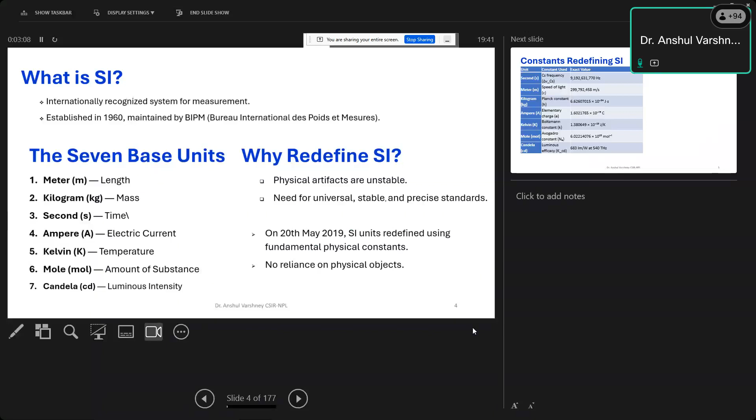The main benefit of moving to physical constants is that there is no reliance on physical objects, so there is no chance of any change in the standard. Based on the 2019 redefinition, the second is now defined with the help of the hyperfine frequency of cesium, that is 9192631770 hertz, and the meter is defined using the speed of light.

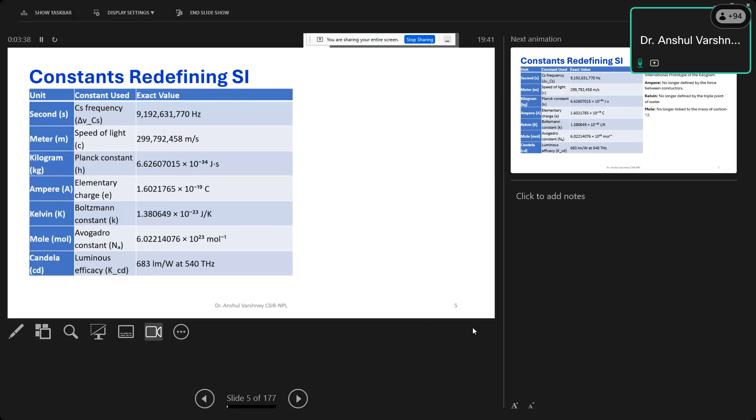Similarly, kilogram has been redefined using Planck's constant, ampere with the help of the elementary charge of the electron, Kelvin with the help of the Boltzmann constant, mole with the help of the Avogadro constant, and candela with luminous efficacy.

So now, major changes: the kilogram is no longer based on the international prototype of the kilogram, which was a physical artifact. Now the kilogram is defined with the help of Planck's constant, which will never change. If environmental conditions change, there will be no effect on Planck's constant.

Similarly, ampere is no longer defined by the force between two conductors; it is now defined with the help of elementary charge. Kelvin no longer has a relation with the triple point of water; it is now defined with the help of the Boltzmann constant. Similarly, mole is no longer linked to the mass of carbon-12; now it is defined with the help of the Avogadro constant.

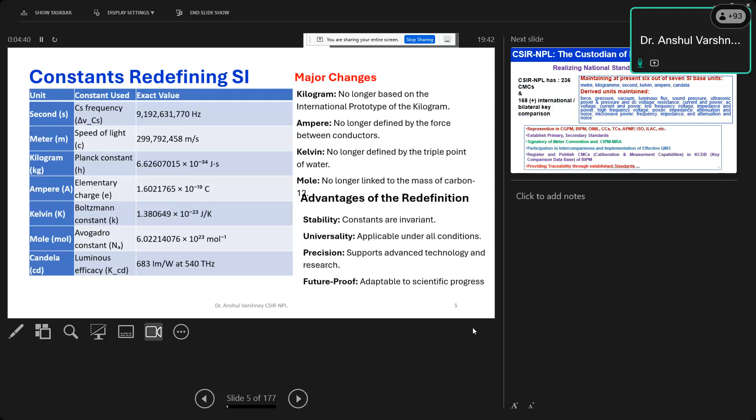So the advantage of this redefinition is that constants are invariant. These are applicable under all environmental conditions, and they provide very precise measurement which supports advanced technology and research, and are adaptable to scientific progress.

So if I talk about NPL, NPL is basically realizing national standards of measurement. NPL right now has 236 CMCs. CMC means calibration and measurement capability. Every country has some CMCs, and that CMC data is maintained in an international database. The ranking of a country is defined with the help of these CMCs. Right now India has 236 CMCs, but in the coming year it is increasing.

By the end of next year, it will cross around 280 CMCs, and we have participated in more than 168 international or bilateral key comparisons. So what is a bilateral or international comparison? In an international comparison, basically we send one artifact to a number of countries. Every country does some measurement, and then the analysis of that measurement is done based on the actual results of those artifacts.

Right now NPL has representation in CGPM, BIPM, OIML, CCs, TCs, APMP, ISO, and ILAC, and it is establishing primary and secondary standards of measurement. NPL is a signatory of the Meter Convention and the CIPM Mutual Recognition Arrangement, and we actively participate in various intercomparisons and the implementation of an effective quality management system.

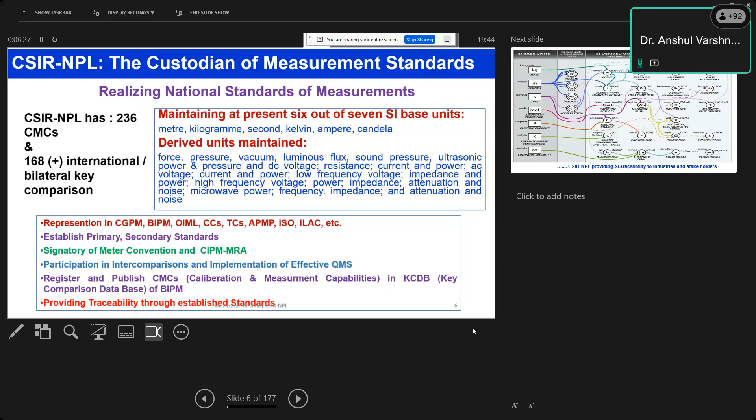Every month we are registering and publishing more and more CMCs in the key comparison database of BIPM, the Bureau of International Weights and Measures, France, providing traceability to the country through our established standards. So basically we are maintaining all the SI units and their derived units. You can see there are... just one second, let me point this out.

These are the SI units and their derived units. So we are maintaining all the SI units and their derived units.

At NPL, we are serving government, semi-government, private industries, even SAARC nations. We are providing support to all PSUs, all defense and strategic sectors, BIS and other calibration bodies also.

So now I have a small video which will show what NPL is doing since 1947. It's not a long video, only about 1 or 2 minutes.

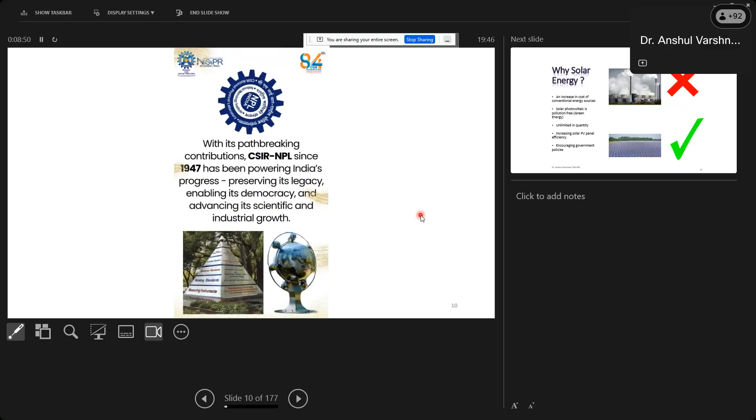So this was about NPL. You have seen in this video that our Prime Minister is viewing the Constitution of India. That is the original handwritten Constitution of India, which is being preserved by NPL.

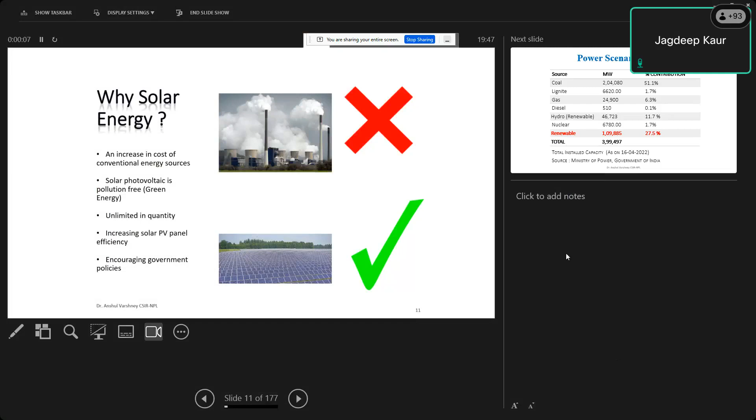Excuse me sir. Yes madam. Sir, I think only your first slide is showing, presented by Dr. Anshul Varshney. Just one second ma'am. No sir, your screen is visible to us. I think the slides are visible ma'am. Some network issues. Slides are changing, sir. Some problem, madam. Okay, okay, so I am continuing.

As you have seen, the original handwritten Constitution of India is preserved by NPL. You have also seen that whenever you cast your vote, that person puts some ink on your finger. That ink was basically developed by NPL, and later that technology was transferred to Mysore Paints.

So now I'm starting my presentation on solar water pumping systems. What is the need of solar energy? Why is solar energy required?

Right now, day by day there is an increase in the cost of conventional energy sources, and they are responsible for increasing pollution also. However, solar photovoltaic is pollution free and known as green energy, available in unlimited quantity. As Dr. Arun already told, NPL is doing great research in solar cells, working to increase the efficiency of solar panels. There are also several encouraging government policies, which Dr. Arun already explained, because of which solar energy has become a prominent source of energy for various applications.

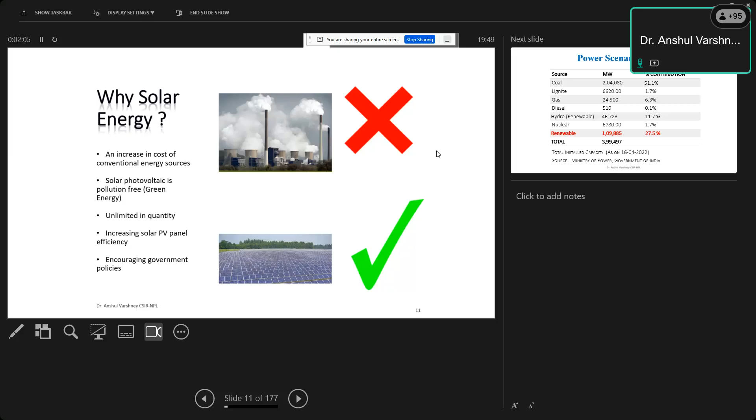This is the power scenario in India as per some old data. Coal contributes 51.1%, lignite 1.7%, gas approximately 6.3%, diesel 0.1%, and hydro 11.7%. Similarly, these are the renewable energy scenarios in India, including hydro also.

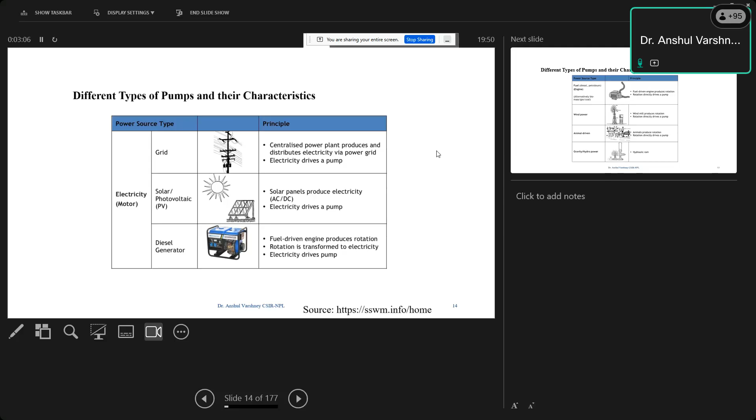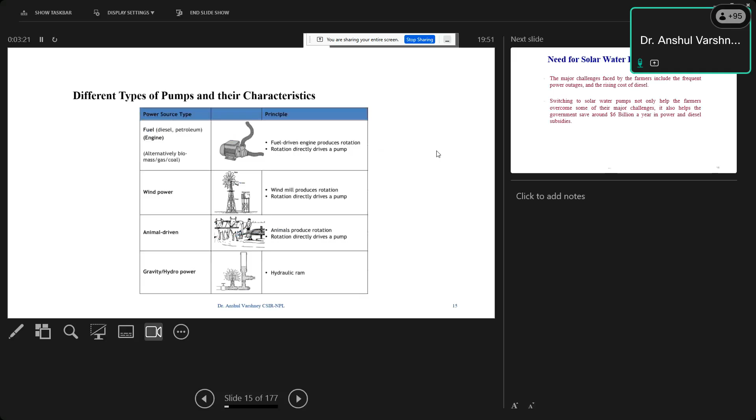Similarly, in fuel based water pumping systems, a fuel driven engine produces rotation that directly drives the pump. There are also wind power based water pumping systems, earlier used animal driven water pumping systems, and hydropower systems. So what is the need for solar water pumping systems?

The major challenge faced by farmers includes frequent power outages and the rising cost of diesel. Switching to solar water pumps not only helps farmers overcome some of their major challenges, but also helps the government save a huge amount of money in power and diesel subsidies. So basically, this is how solar water pumping systems work in India.

By the end of 2023, approximately 3 lakh 40,000 water pumping systems have been installed throughout the country. Solar water pumps come under the off-grid PV schemes of the Jawaharlal Nehru Solar Mission and are provided up to 30% capital subsidy along with loans at very genuine interest rates.

When it comes to the states, Rajasthan has been a pioneer in promoting solar water pumps and offers an additional good subsidy above the MNRE subsidy, which means the solar water pump owner gets a sufficiently good amount of subsidy in total. So this is basically a basic animation of a solar water pumping system.

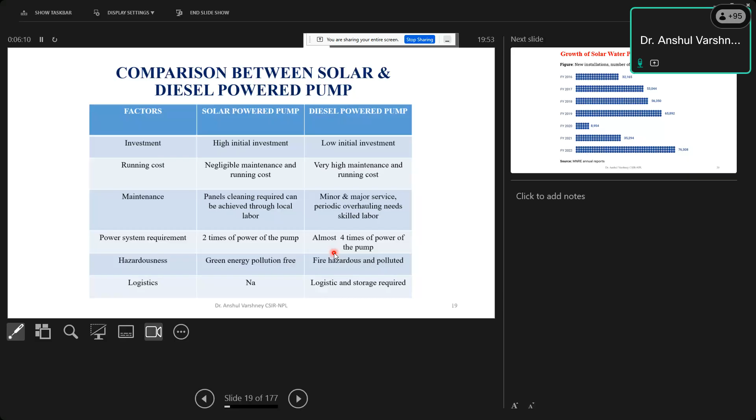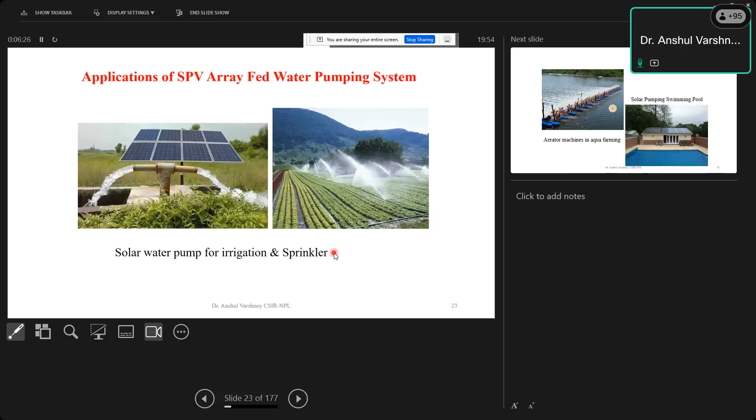These are some applications of solar water pumping systems. Solar water pumping can be used for irrigation and sprinklers, as well as for swimming pools, aerator machines in aqua farming, solar water fountains, domestic and municipal water supply, livestock and fish tanks, solar water heating systems, RO systems, and civil, industrial and mining systems.

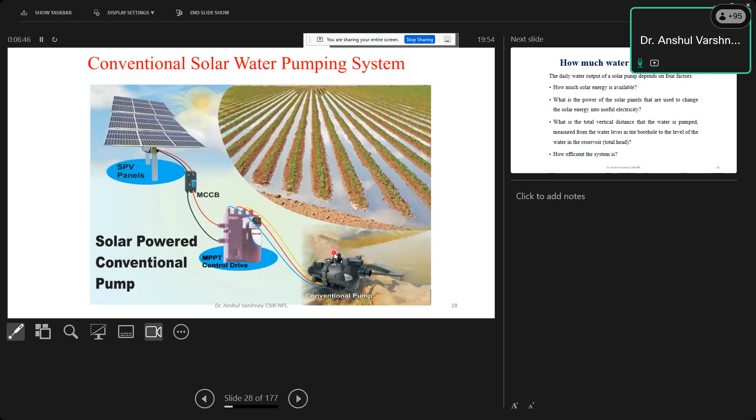So this is basically a conventional solar water pumping system. How much water does a solar water pumping system pump? The daily water output of a solar pump depends on four factors: how much solar energy is available, and the power of the solar panels used to change solar energy into useful electricity.

The total vertical distance that the water is pumped, measured from the water level in the borehole to the level of water in the reservoir, and how efficient the system is. These four factors decide how much water the solar water pumping system will pump.

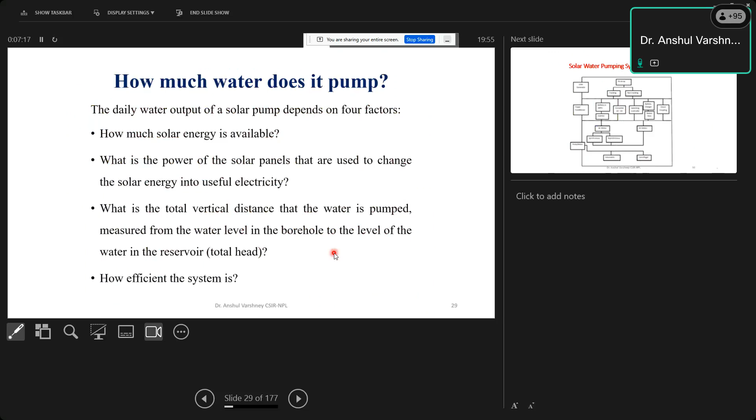So in this talk, I have targeted only one type of motor, that is the synchronous reluctance motor. I will discuss in detail about the synchronous reluctance motor, and why I have chosen it.

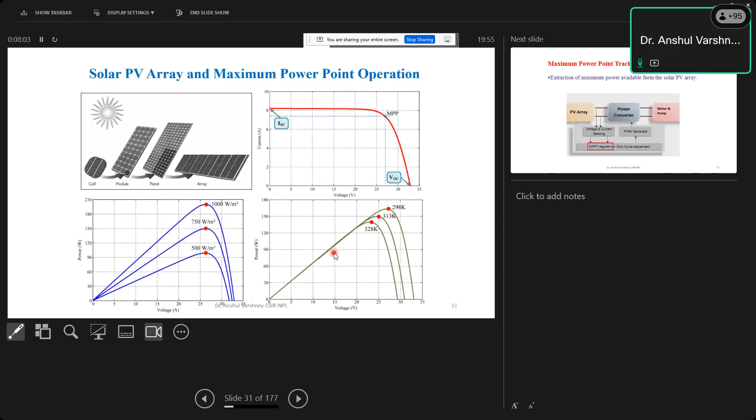So basically, in a solar PV array, we are always operating at maximum power point tracking. This is one important part of a solar water pumping system.

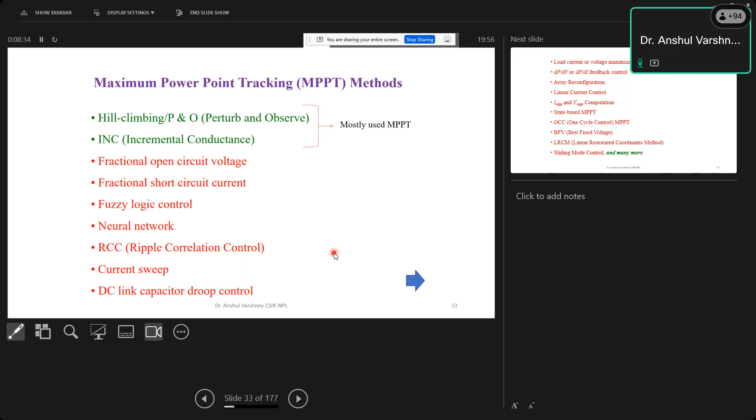MPPT is used for the extraction of maximum power available from the solar PV array, and there are several MPPT techniques available, like hill climbing, incremental conductance, fractional open circuit, fractional short circuit, fuzzy logic, neural network, and many more. In this work, we have only used the very simplest incremental conductance MPPT technique. There is nothing new; we have used an already available MPPT technique.

The aspects of MPPT techniques include complexity, how many sensors are required, convergence speed, cost, range of effectiveness, implementation hardware, and popularity. There are now several MPPT techniques available which use fewer sensors, which is responsible for reducing the complexity.

Now MPPT techniques have been combined with AI also to reduce the complexity burden. So I told you that I have chosen synchronous reluctance motor for this work. Why have I chosen synchronous reluctance motor? There are several motors available, so I have chosen it because synchronous reluctance motor is basically induction motor outside and innovation inside.

Innovation inside means you can use the same stator as is being used in the induction motor. However, you need to change something with the rotor part. In synchronous reluctance motor, there is nothing on the rotor - no winding, no magnet, which is responsible for the reduction in the losses of the motor.

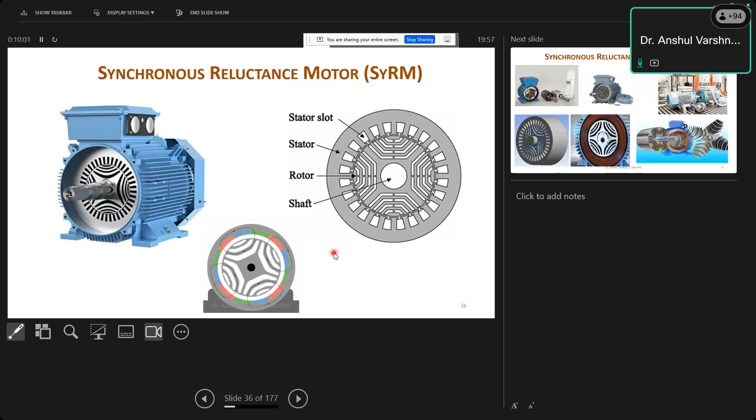If we are talking about induction motor, it is widely used for water pumping systems, but the major disadvantage is that the efficiency of induction motor is not as good, and the control circuit is very complex for induction motor.

So if you are talking about synchronous reluctance motor, you can see it is having some type of stator. There is nothing on the rotor, this is punched. There are only some slots on the rotor.

However, if you are talking about other motors like PM motors and induction motors, there are some windings or permanent magnets, which is responsible for increasing the cost of the motor, and there are some losses also. So in this motor there is nothing on the rotor - that's why we have chosen this motor for water pumping application.

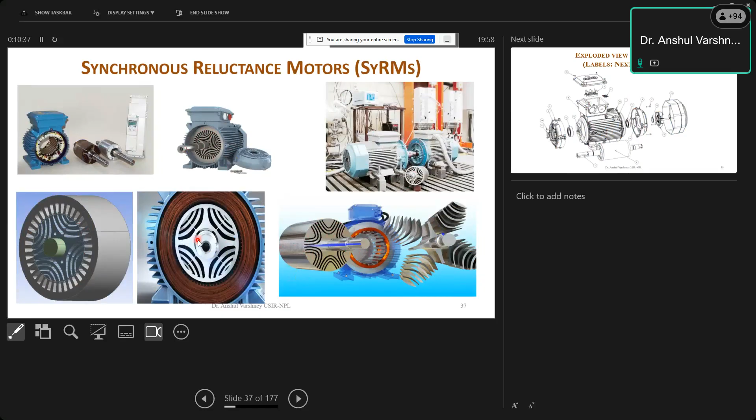When it is not having field winding on the rotor, joule loss is almost zero, so because of that the efficiency of this motor is pretty good. Speed of this motor is varied by controlling stator voltage and frequency, and there is no slip. There is synchronous operation without magnet, and this configuration has no starting cage.

So this motor can only be run with the help of inverter power. This you can consider a disadvantage, because induction motor you can start without any controller.

So this is basically the cross section of a synchronous reluctance motor. You can see this is the stator and stator winding, and this is the rotor. Rotor is having some slots. There is no magnet, no squirrel cage on the rotor. Because of that, there are no joule losses in the rotor.

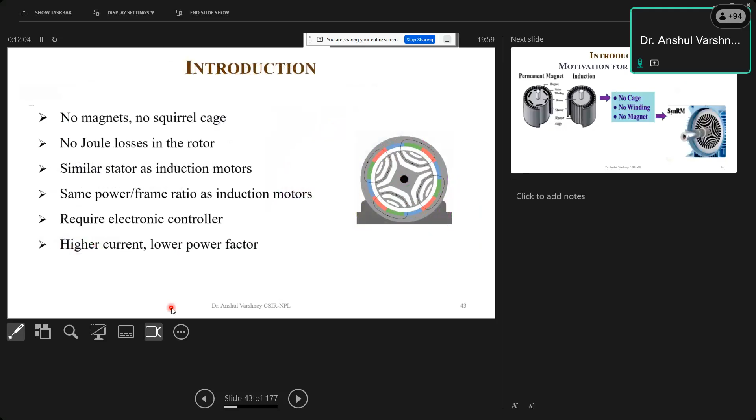Similar stator as induction motor, same power frame ratio as induction motor, and it requires an electronic controller for running this motor. So if we are looking for the difference between permanent magnet and synchronous reluctance motor, there is no winding, no cage, and no magnet in synchronous reluctance motor.

So recently, this motor has gained great importance by researchers, and even in industries also. This motor has been a subject of interest for many variable speed industrial applications. There are no windings, magnets, or cage in the rotor. The rotor of synchronous reluctance motor is cheaper and lighter than the rotor of induction machine and permanent magnet synchronous machine of the same size.

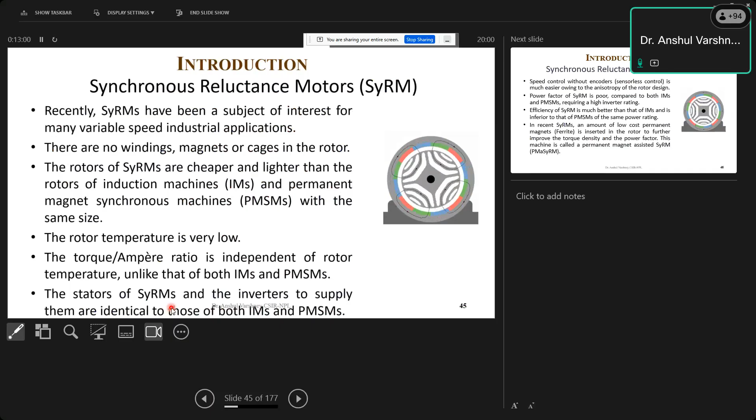Because there is nothing on the rotor, temperature is very low. The torque-ampere ratio is independent of rotor temperature, unlike that of both induction motor and permanent magnet synchronous machines. The stator of synchronous reluctance motor and the inverters to supply them are identical to those of both induction motor and PMSM.

And speed control without encoders - basically I have targeted without encoder because these submersible pumps are installed hundreds of feet below the ground. And if you are using an encoder, you need to lay a long cable, and that cable may break, that signal may then lose its strength. You will not be able to efficiently calculate the position of that motor.

So I have chosen the sensorless control. Sensorless control is much easier in this motor. The main disadvantage is that the power factor of synchronous reluctance motor is not as good as induction motor and PMSM, so because of this it requires a high inverter rating. But the efficiency of this motor is pretty good, so the inverter rating required is high, but solar panel requirement is reduced.

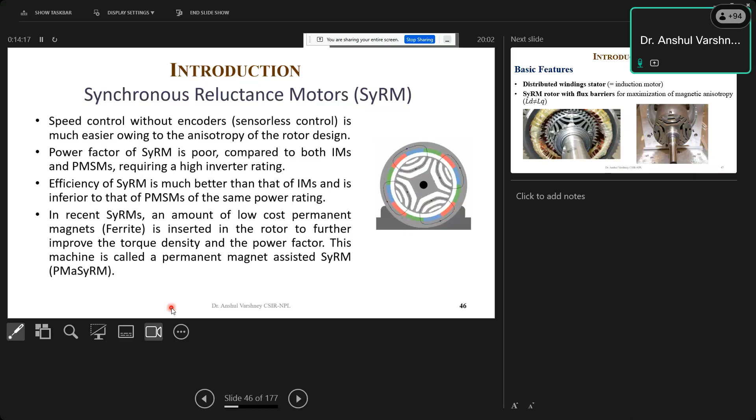Efficiency of this motor is better than induction motor and inferior to that of PMSM of the same power rating. However, in synchronous reluctance motor, an amount of low-cost permanent magnet is inserted in the rotor to further improve its torque density, power factor, and efficiency also. This type of machine is called a PM-assisted synchronous reluctance motor. It has similar winding as induction motor, like distributed winding, however synchronous reluctance motor with flux barrier for maximization of magnetic anisotropy.

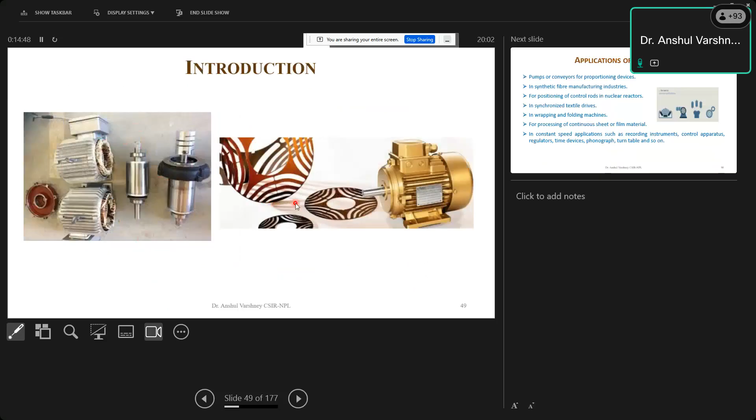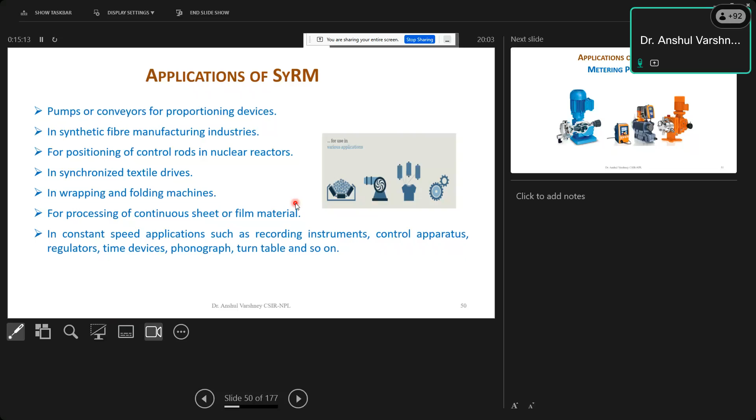The applications of synchronous reluctance motor include pumps, conveyors, proportioning devices in synthetic fiber manufacturing industries, positioning of control rods in nuclear reactors, synchronized textile drives, wrapping and folding machines, processing of continuous sheet or film material, constant speed applications such as recording instruments, control apparatus, regulators, timing devices, turntables, metering pumps, pressure booster systems, and electrical vehicles.

Synchronous reluctance motor for electric vehicles is a very hot area of research.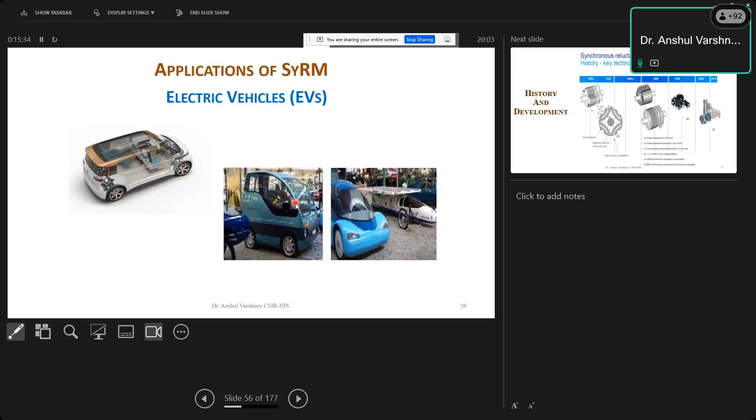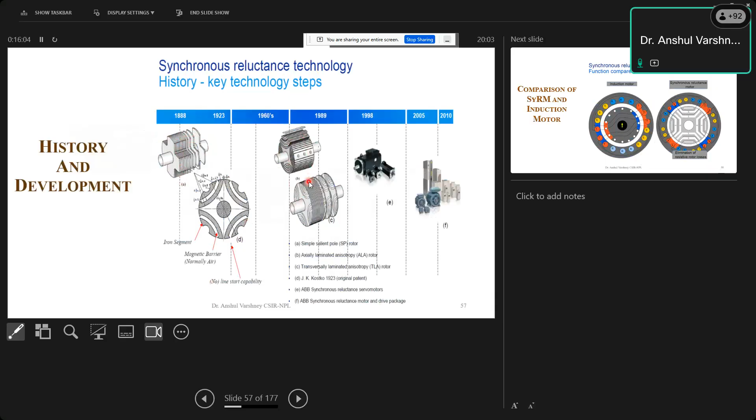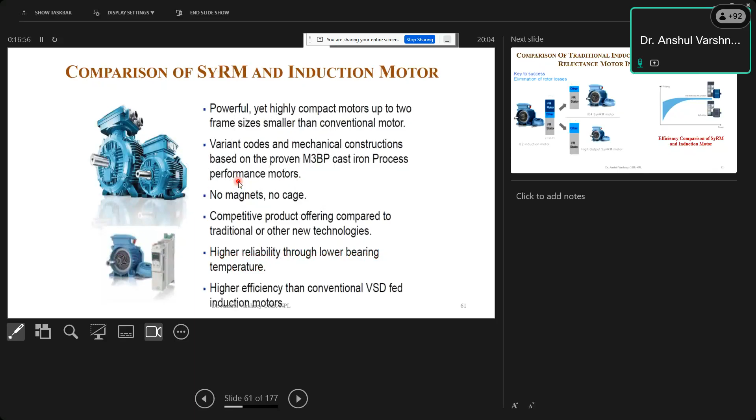Synchronous reluctance motor is very powerful yet highly compact, up to 2 frame sizes smaller than the conventional motor. Variant codes and mechanical construction are based on the proven cast iron process and performance motors. There is no moving magnet and no cage, giving a competitive product offering compared to traditional or other new technologies, with high reliability through lower bearing temperature.

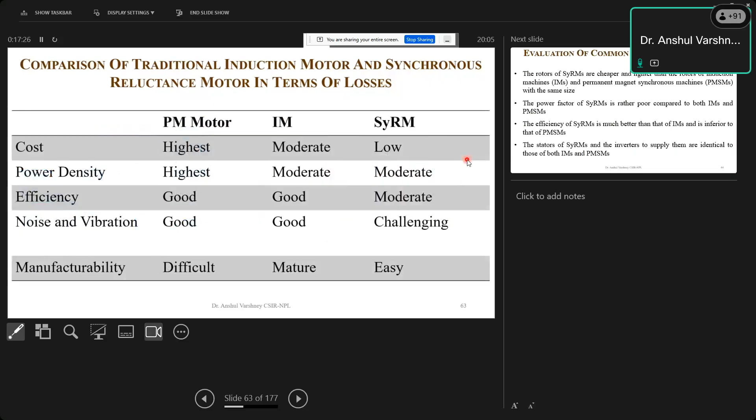The rotor of synchronous reluctance motor is cheaper and lighter than the rotors of induction machines and permanent magnet synchronous machines of the same size. The power factor of synchronous reluctance motor is poor compared to both induction motor and permanent magnet synchronous machine. Its efficiency is much better than induction motor but inferior to PMSM. The stator of SyRM and the inverters to supply them are identical.

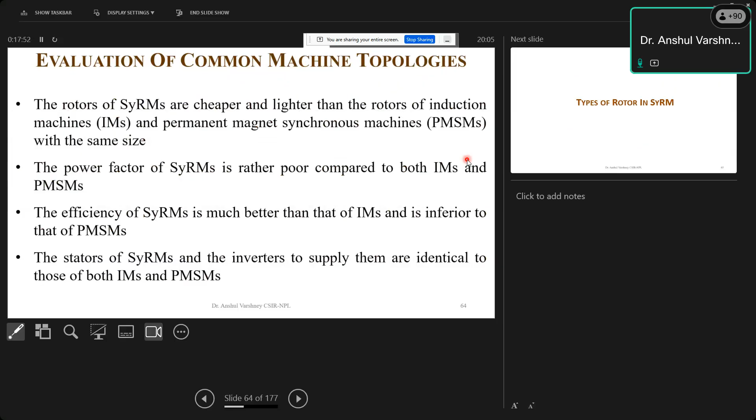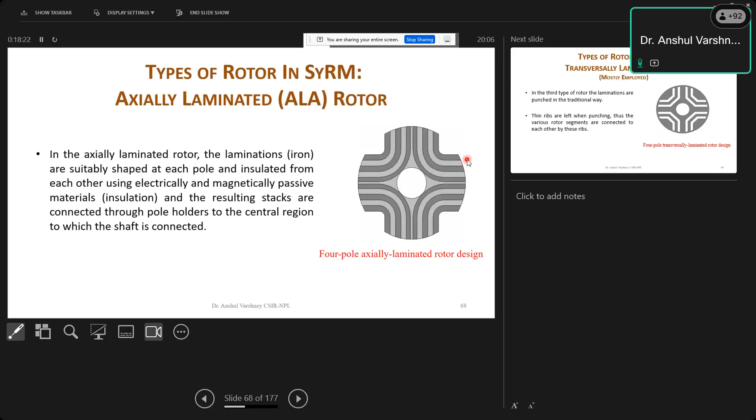The first possibility is made by removing some iron material from each rotor in the transversal region. However, in the axially laminated rotor (ALA), the laminations are suitably shaped at each pole and insulated from each other using electrically and magnetically passive materials, and the resulting stacks are connected through pole holders to the central region to which the shaft is connected. Similarly, in the transversely laminated rotor (TLA), the laminations are punched in a traditional way - thin ribs are left when punching, so the various rotor segments are connected to each other by these ribs.

This is a comparison between TLA and ALA rotor. I am skipping these parts because this is more into the design of the motor. Now I am coming to the water pumping system topologies.

There are many motors available for water pumping systems, like DC motor. The major advantage of DC motor is that you can directly connect it with solar panels, avoiding one power electronic conversion stage. However, this motor is not preferred because of the frequent maintenance requirement.

Induction motor is more reliable and maintenance free compared to DC motor, and it is suitable even in hazardous and contaminated areas. The main disadvantage is that it requires complex control. And next, BLDC motor.

BLDC motor is the most popular motor, and now it is the only motor being used for water pumping application, electrical appliances, and electrical vehicles. This motor has low inertia and friction, much higher speed than other motors, and very high efficiency.

Switch reluctance motor has disadvantages like very high torque ripple and acoustic noise problems. This motor has not received much attention for water pumping application.

Similarly, for synchronous reluctance motors, this motor also has not received much attention for water pumping.

PMSM is useful in submersible installation because of its higher efficiency as compared to induction motor. It's a better choice for global efficiency optimization for water pumping system, but the major disadvantage is that it uses permanent magnet, so there's a chance of demagnetization in high temperature areas.

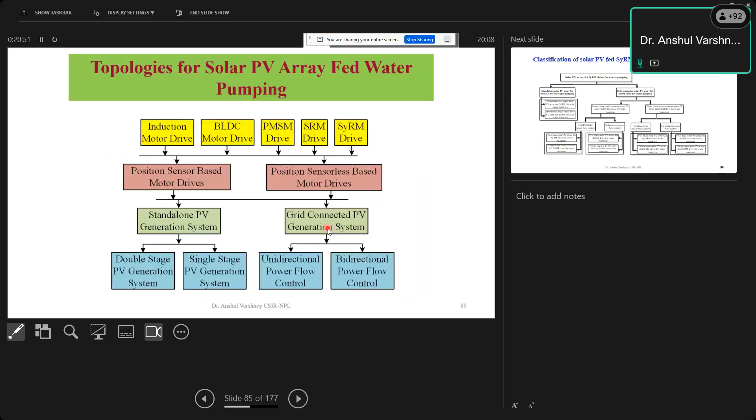This is the very first topology for synchronous reluctance motor based water pumping system. It's a standalone two-stage solar water pumping system based on synchronous reluctance motor drive. This is basically a solar PV array connected to the motor through a boost converter and a voltage source inverter. The DC-DC converter is responsible for the MPPT of this PV array, and this DC power is used to supply power to the motor with the help of this voltage source inverter.

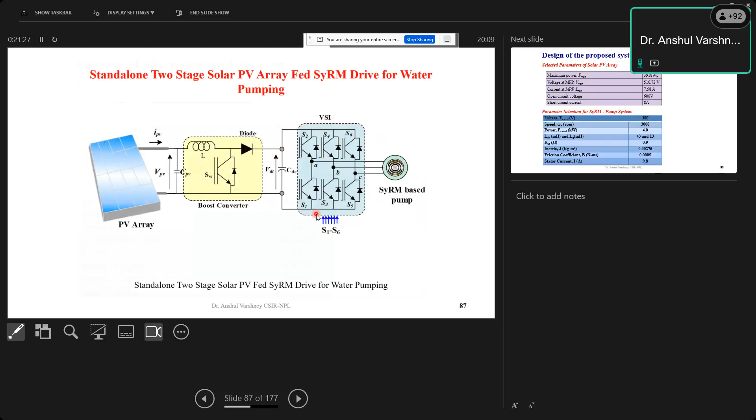These are some parameters. For this application, we have chosen an approximate 3.9 kilowatt MPP solar PV array, and the motor which we have selected for this water pumping application is 380 volt, 3000 RPM, and 4 kilowatt.

This is basically a design of boost converter. For this boost converter, we have calculated the inductance, that is approximately 5 millihenry, and for the capacitor, we have chosen a 2350 microfarad capacitor for this application.

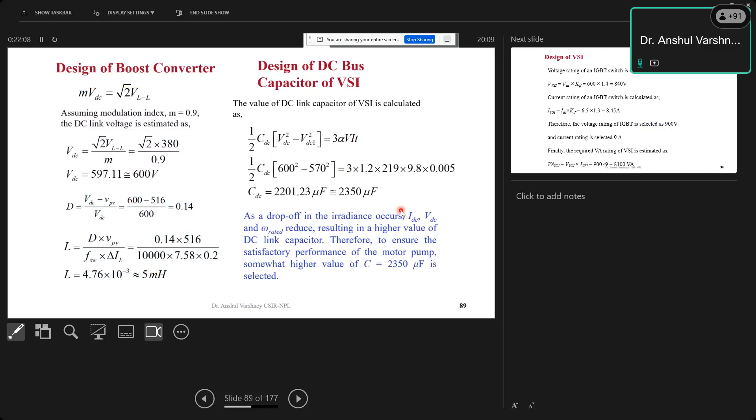This is a design of VSI. The switch voltage rating of IGBT for VSI is approximately 900 volt, and current is 9 ampere. So the required KVA rating of VSI is approximately 8.1 kVA.

The control of system is divided into two parts, like MPPT and control of synchronous reluctance motor. For MPPT, we have chosen the incremental conductance based MPPT technique. This is the simplest type of MPPT technique being used for solar power optimization, and this technique is widely used because of its simplicity.

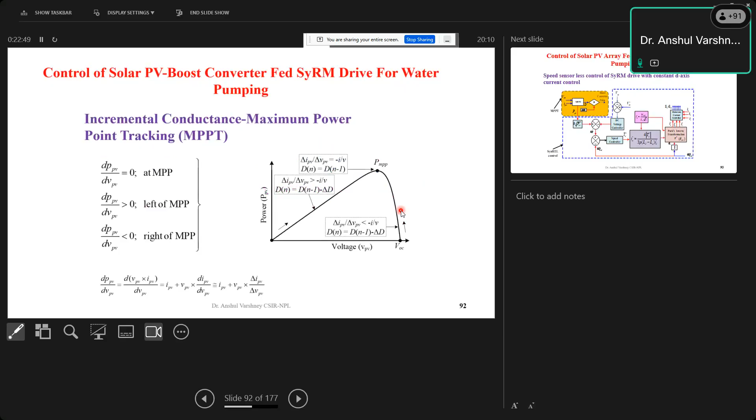This is the conventional speed sensorless control algorithm which has been used for the induction motor. We tried to use the same technique with synchronous reluctance motor, and we found that the same technique worked for both motors.

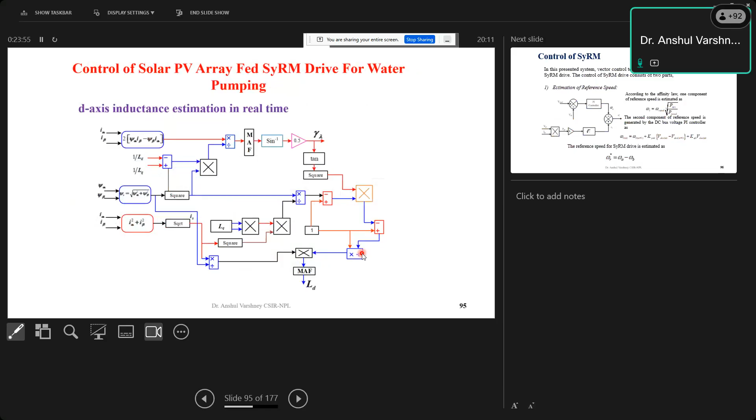Whenever we are designing the rotor of this motor, two inductances come into the picture: D axis and Q axis inductance. Because of cross saturation, the D axis inductance changes with the motor speed. So we have estimated the D axis inductance in real time for this application.

The control of motor is divided into two parts, like estimation of reference speed. According to the affinity law, one component of reference speed is estimated with the help of rated speed and available solar power. The reference speed is a component of available solar power. As solar power changes, the reference speed changes, and when reference speed is changing, actual motor speed follows the reference speed. The reference speed can be calculated with the help of these two components.

Second part is control of synchronous reluctance motor. We have used simple field oriented control, vector control for synchronous reluctance motor. This is the simplest control. Basically, for induction motor, we can do V/f control, vector control, and direct control. Here we have used vector control and I/f control.

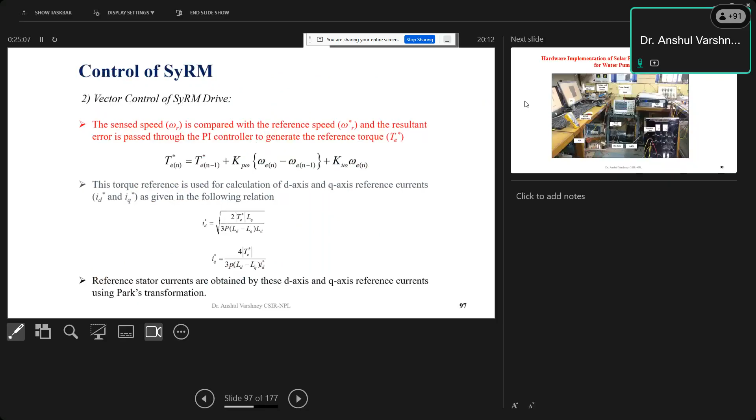Where we have used I/f in place of V/f, we have used I/f control, and where we have used I/f control and why we have used I/f control, I will explain. So this is basically

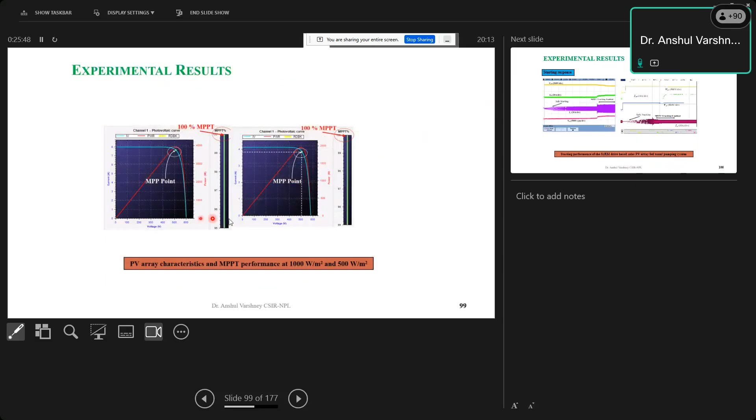If we are talking about experimental results like MPPT techniques, these are the MPPT characteristics at 1000 watt per meter square and 500 watt per meter square. In both cases, you can see MPPT is almost 100%.

During I/f control, we are slowly increasing the D-axis current, and during starting we are disabling the MPPT. We are starting the motor without MPPT, so we are in I/f control and without MPPT.

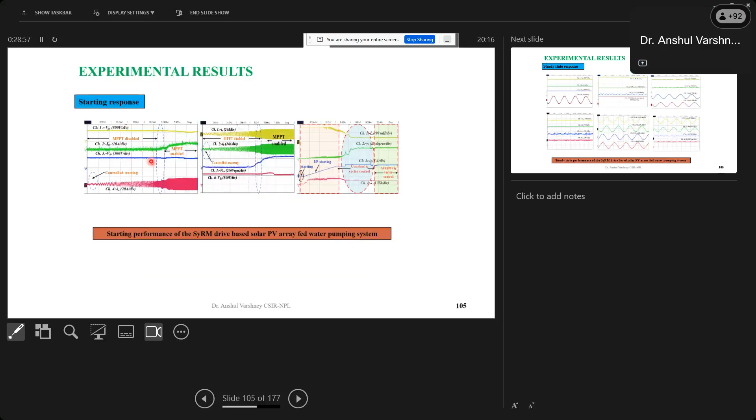So this is basically the MPPT performance for 1000 watt per meter square and 500 watt per meter square. You can see for both conditions MPPT is almost 100%. And if we are talking about starting response, you can see here also the motor starting current is in limit.

So this is basically controlled starting, and we have patented this starting also. We are having a patent in this area.

Earlier we have disabled the MPPT, and when the motor attains some steady state speed, then MPPT is enabled, which results in the safe starting of the motor. You can see this is the starting, this is I/f starting, and this is constant D-axis current control, and then adaptive D-axis current control.

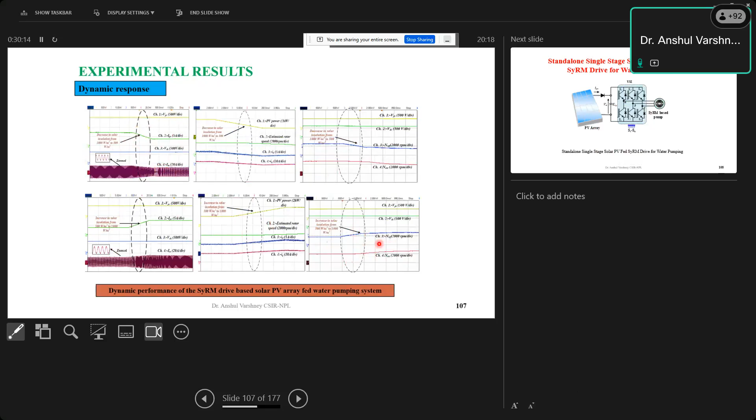Similarly, when solar insolation is increased, the motor speed is increased. You can see solar insolation is increased, motor reference speed is changing, and motor estimated speed is exactly following the reference speed. Now earlier we were talking about two-stage solar water pumping system.

Now it comes to single stage solar water pumping system. In single stage, one power conversion stage is avoided. There is no DC-DC converter. MPPT and motor control both are performed with the help of only one VSI.

The advantage of this technique is that one power electronic conversion stage is avoided. Because of this, the size and weight of the power electronic controller reduces. But the disadvantage is there are some fluctuations in DC link voltage because there is no DC-DC converter.

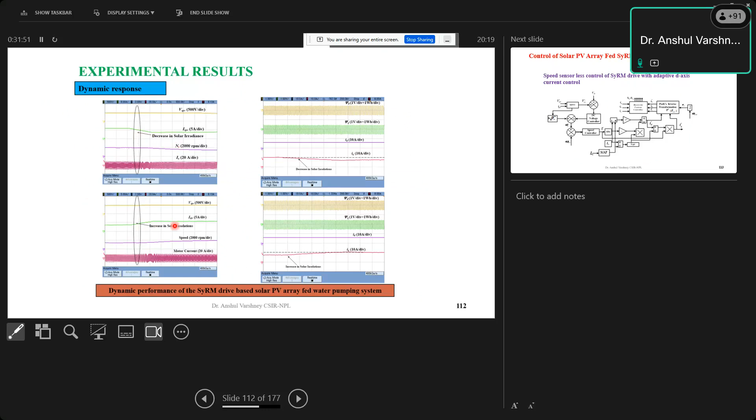This is the dynamic response for decrease in solar irradiance and increase in solar irradiance. As solar insolation is decreasing or increasing, the motor is exactly following the same pattern. If it is increasing, motor is rotating at the maximum speed, and when it is reducing, the motor speed changes correspondingly.

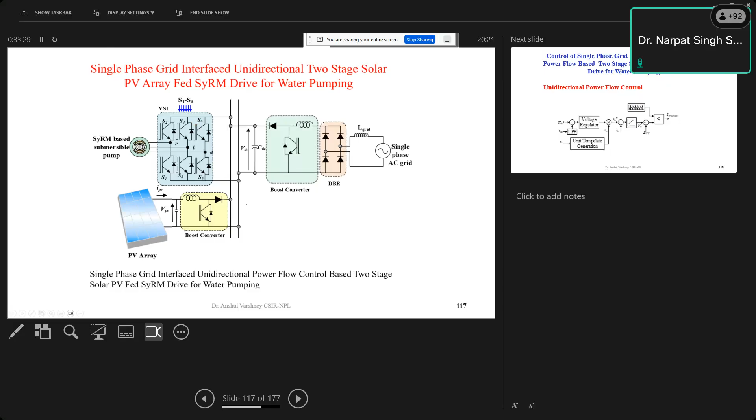Now this is basically a grid interface unidirectional two-stage water pumping system. So grid and PV array both are interlinked with the help of a DC link, and since we have connected grid with the system, a unidirectional power flow control mechanism is also required.

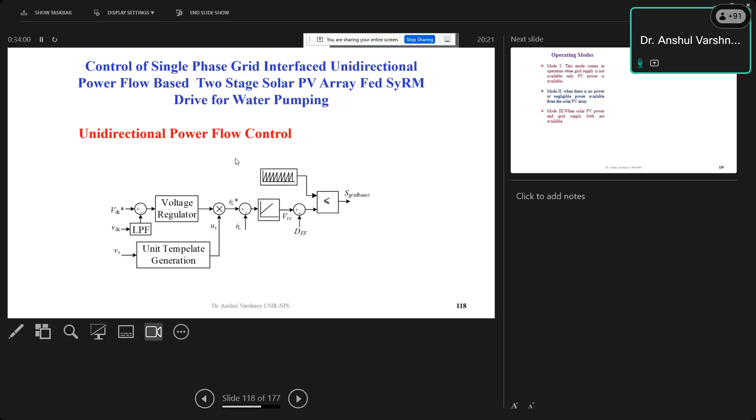So this is basically a unit template based control algorithm used for generating the pulse for the grid side boost converter. The system is basically working in three modes: in mode 1, only PV power is available; in mode 2, when there is no PV power available, the system works with the help of grid only; in mode 3, both solar PV and grid supply are available.

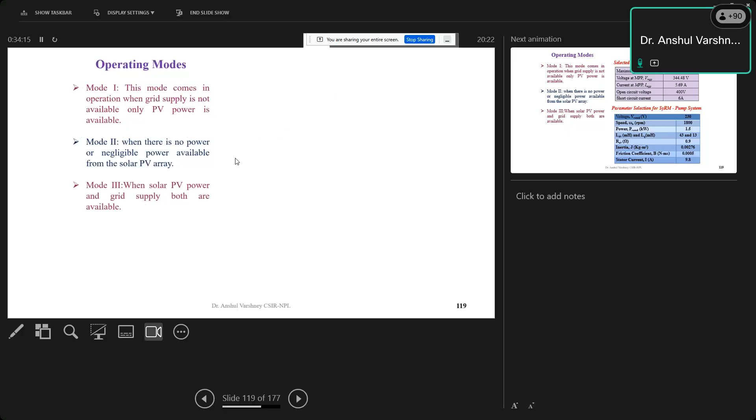So the parameters for this system: we have chosen an approximate 2 kilowatt PV array, and motor rating is 1.5 kilowatt. The motor speed is 1800 rpm. This is the basic design of the grid side boost converter, where we have calculated the inductance, capacitance, etc.

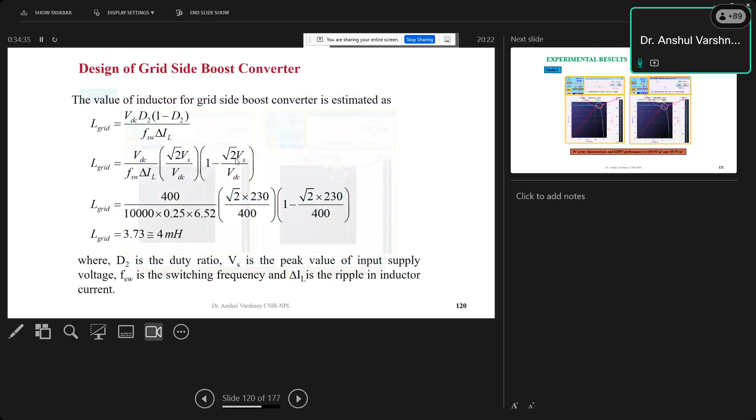If we are talking about starting and steady state, it is similar to the standalone system, because there is no grid, the system is behaving like a standalone two-stage water pumping system.

Similarly for dynamic response, when there is no PV power, only grid is available. In that case, the water pumping system works with the help of grid supply only, and in the grid supply mode, safe starting is also maintained. When we are running this motor with the help of grid only, the current THD is only 2.5%, which is as per IEEE 519 standard. IEEE 519 standard says the current THD should be less than 5%.

So when we are talking about mode 3, when PV power is also available and grid supply is also available, in that case, the control of the system has been designed in such a way that maximum power is taken from the PV source, because PV power is freely available.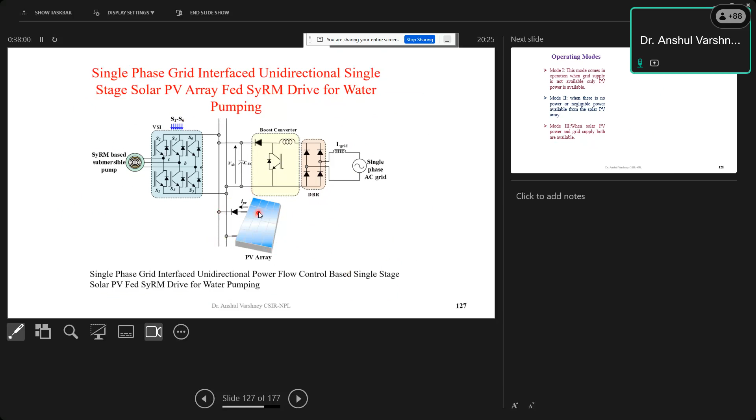Now, earlier we were talking about two stage, now we are talking about single stage grid interface irrigation water pumping system. The system works similarly as the previous system, but one DC-DC power converter has been avoided. This system also works in three modes: when there is only PV power, when there is only grid power, and when both powers are available.

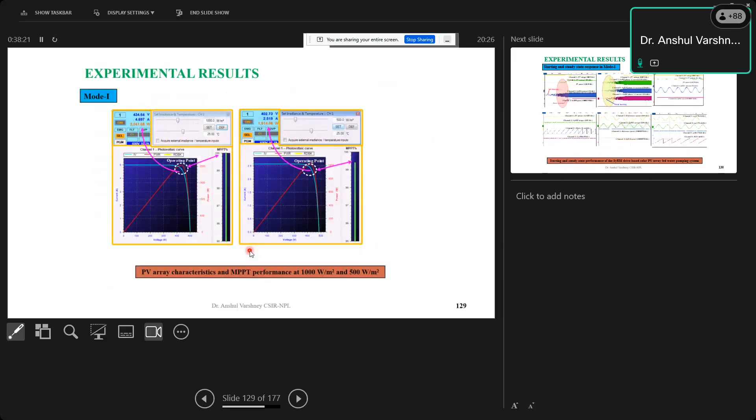If we are talking about MPPT, it is almost similar for 1000 watt per meter square and 500 watt per meter square. In both cases, MPPT is almost more than 95%. And if we are talking about steady state response, the motor starting current remains within safe limits to avoid any damage to the motor, and the motor runs perfectly fine with only PV power.

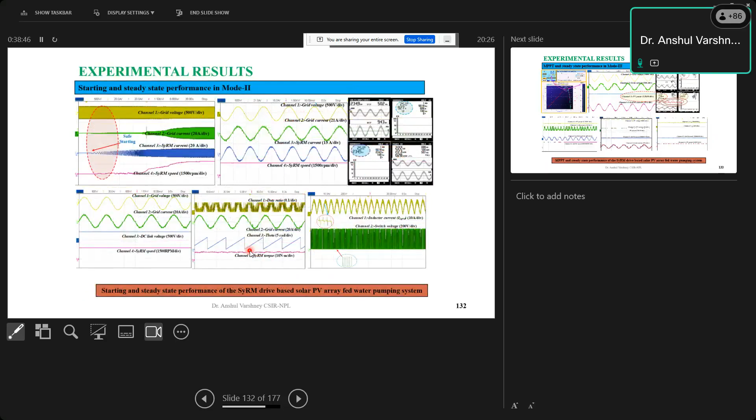If we are talking about mode 2, there is no PV power, only grid supply is available. In that case, the current THD is less than 5% as per IEEE 519. The motor is taking 100% power from the grid because there is no PV power available, and safe starting is also enabled in this mode.

Now it comes to the single phase grid integrated bidirectional system. Earlier we were talking about a unidirectional power flow system; now we are talking about bidirectional. In unidirectional, you cannot inject the excess PV power to the grid. However, in case of bidirectional, since water pumping is not required all the time, when there is excess solar power available, that excess solar power is being injected into the grid, which results in financial benefit to the users.

So basically this is a front-end converter, and this system is like a standalone system. This scheme is for bidirectional power flow control. With the help of this control scheme, we are providing the pulses for this front-end converter.

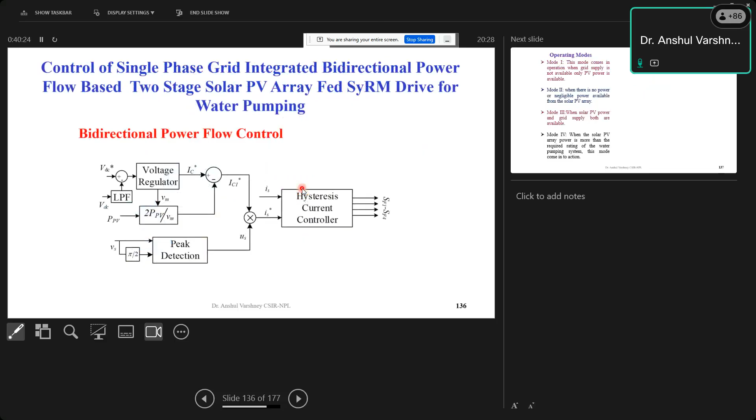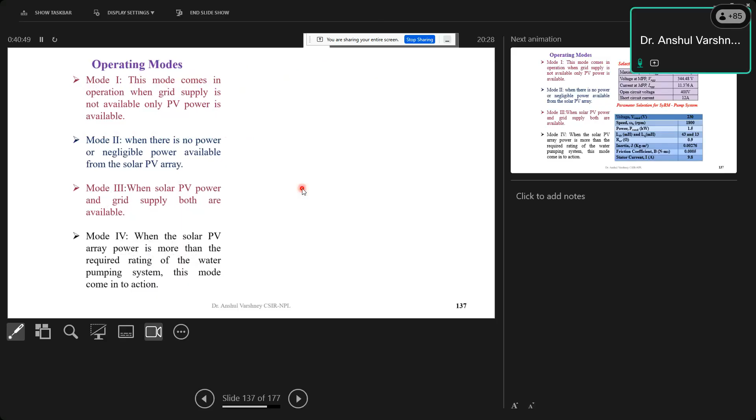Earlier the system was working in 3 modes; similarly, this system works in 4 modes. Mode 1, when there is only PV power available. Mode 2, when there is no power available from the PV array, it works with the help of grid only. Mode 3, when solar PV and grid supply both are available. And mode 4, when the solar PV array power is more than the required rating of the water pumping system, then this mode works. The rating for this system: we have taken a 4 kilowatt PV array and 1.5 kilowatt motor. You can say this solar PV array rating is pretty high compared to the motor.

When solar insolation increases to either 750 or 1000 watt per meter square, the maximum power is still 2 kilowatt, so there is no need of MPPT; the system works in off-MPPT mode. If we are talking about the starting response, in this mode also the starting currents remain in safe limits, and the motor starts safely and rotates at its rated speed to provide 100% rated water discharge.

This is the dynamic response. In mode 2, when there is only grid supply, the safe starting is also enabled in this mode, and the current THD is approximately 1.6%, which is as per IEEE 519 standard.

Now mode 3 is also similar. If 50% power sharing is enabled, 50% power is taken from the solar PV array and the rest deficit 50% power is taken from the grid to run the motor at its rated speed.

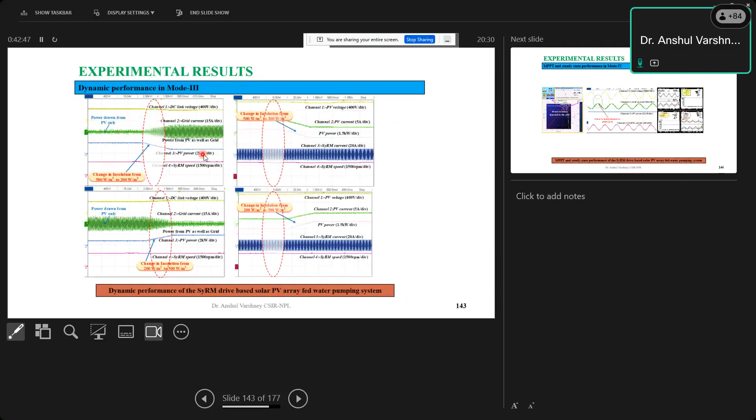In mode 3, solar insolation is increasing or decreasing from 500 to 200 watts per meter square. When solar insolation is 500, 100% power is being taken from the PV array and grid current is almost zero. When solar insolation decreases, PV power decreases and the deficit PV power is taken from the grid to run the motor at rated speed.

Similarly, for dynamic performance in this mode, when solar PV array capacity is more than the required rating of the motor, when solar insolation is 800 watts per meter square, power is being injected into the grid. When solar insolation reduces from 800 to 300, mode 4 to mode 3 change occurs, and the motor takes some power from PV and deficit power from the grid to run the motor at rated speed.

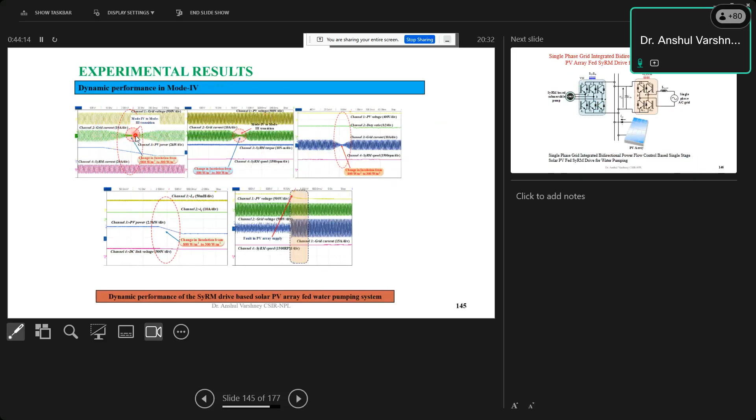This is basically 2 stage. Now this is for single stage. Single stage is almost similar; only the DC-DC power converter is avoided in this stage. The results are almost similar in this mode also.

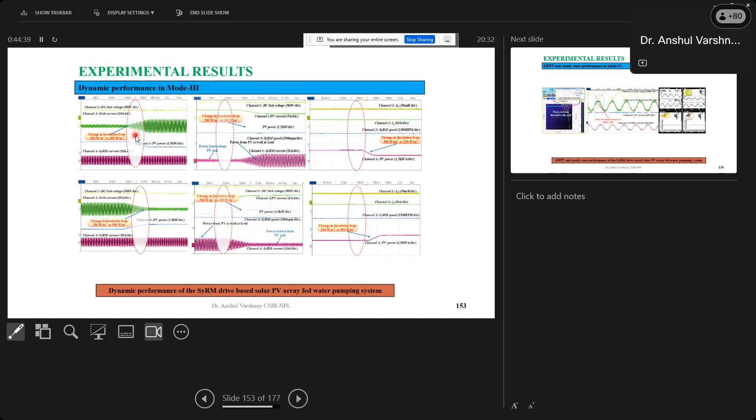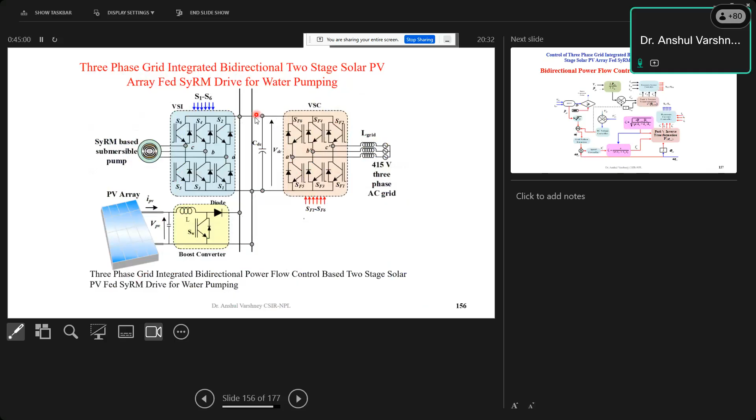So now I am coming to the 3 phase system. For higher rating motors, a 3 phase grid integrated bidirectional double stage solar PV array fed water pumping system has been used. There is a 3 phase grid connected through a voltage source converter through the DC link capacitor to the pump. This is basically the bidirectional power flow control scheme for this system.

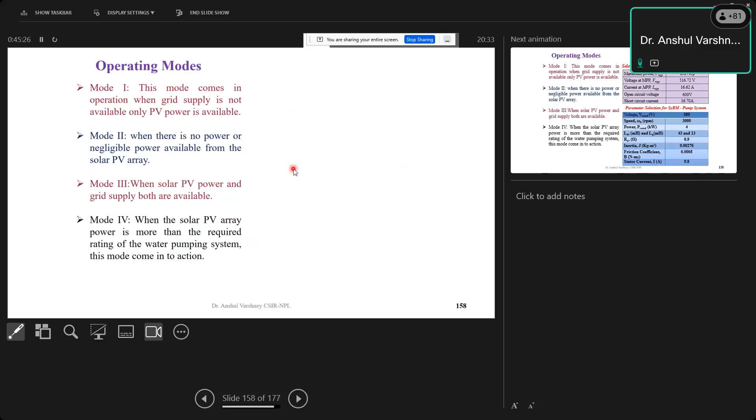This system also works in 4 modes: mode 1 when there is only PV power, mode 2 when there is only grid, mode 3 when PV and grid both are available, and mode 4 when the solar PV array power is more than the required rating of the water pumping system. For this system we have taken a solar PV array of approximately 8 kilowatts and motor rating of 4 kilowatts.

In this case, when solar insolation is approximately 500 watts per meter square, the MPPT power is approximately 4 kilowatts, which is sufficient to run the motor at rated speed. When solar insolation increases, because in mode 1 there is no grid available, we are not able to inject power into the grid. So in that case, the system will work in off-MPPT mode.

This is the starting and steady state response in mode 1, where there is only PV power available. Soft starting is enabled and the motor runs at rated speed. You can see earlier MPPT is disabled, and after reaching some steady state speed, the MPPT is enabled. For dynamic response also, when solar insolation either increases or decreases, correspondingly motor speed increases or decreases as the solar power changes.

If we are talking about mode 2, when there is only grid supply available, the motor also runs at rated speed, providing the rated water discharge from the pump and maintaining the power quality parameters as per IEEE 519 standard.

If we are talking about mode 3, power sharing is done between the grid and PV. The motor rating is 4 kilowatts. 2 kilowatts power is taken from the solar PV array, and the rest deficit 2 kilowatts is taken from the grid, maintaining power quality as per IEEE 519 standard. Current THD is approximately 3.7%.

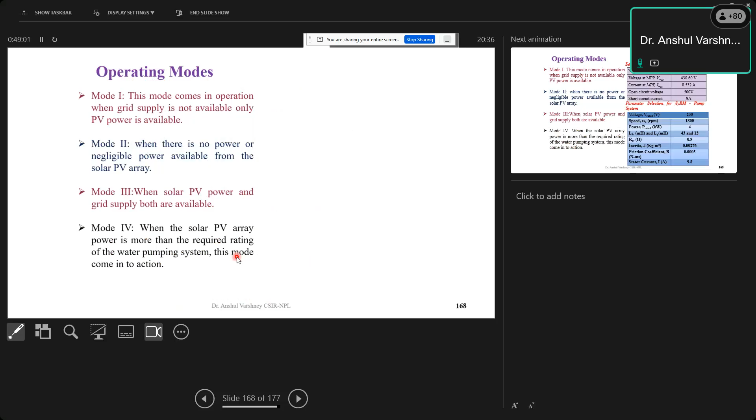This is another topology for grid-integrated bidirectional single stage systems. Here, one power conversion stage is avoided to reduce the complexity, size and weight of the system. This system also works in 4 modes, similar to the earlier one: mode 1 when there is only PV power, mode 2 when there is only grid power, mode 3 when solar PV power and grid supply are both available, and mode 4 when power is being injected into the grid. For this system, we have taken a 4 kilowatt system.

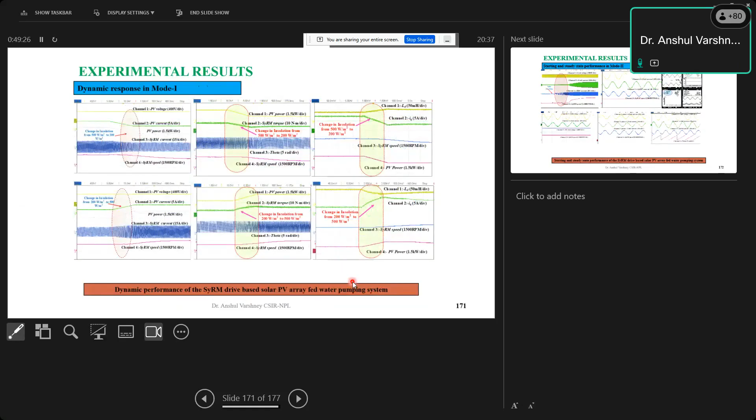This is the MPPT and off-MPPT operation in mode 1, when there is only PV power available. This is the starting and steady-state response, similar to the previous case. These are the dynamic responses when solar insolation is either decreasing or increasing. This is for mode 2, when there is no PV power, and all power is taken from the grid, maintaining power quality parameters as per IEEE 519 standard.

This is mode 3, the power sharing mode, where power is shared between the grid and PV. This is the dynamic response in mode 3 when solar insolation is either increasing or decreasing. Since mode 3 is a power sharing mode, if solar insolation decreases, deficit power is taken from the grid; if solar insolation increases, excess power is injected into the grid.

These are the characteristics in mode 4, when excess solar power is available beyond the required motor power rating. In that case, the excess solar power is injected into the grid. This is the dynamic performance in mode 4.

So this is all about the solar water pumping topologies which have been developed, and some topologies have been patented. Out of these five topologies, 3 have been patented and granted, and 1 is in the application stage, awaiting further processing.